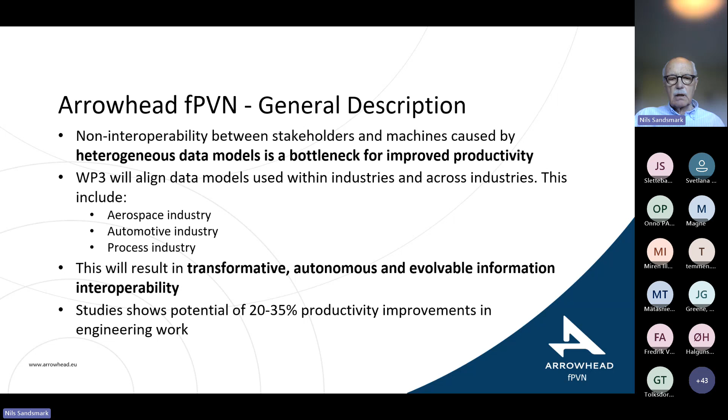There are 3 industries included: aerospace industry, automotive, and the process industry. And process industry also includes oil and gas. We have started out by looking into what data models we should look into and with what standards we should look into, and they are listed here.

The automotive work packages, or use cases, are a little bit special. It's much about how to produce things efficiently, talking to machines instead of pressing buttons, and so on and so forth. For the aerospace industry, those standards listed here are more familiar to at least those of us who have been working in the aerospace industry. And the same is the case for the process industry - these standards should be fairly well known to everybody working in the process plant industries.

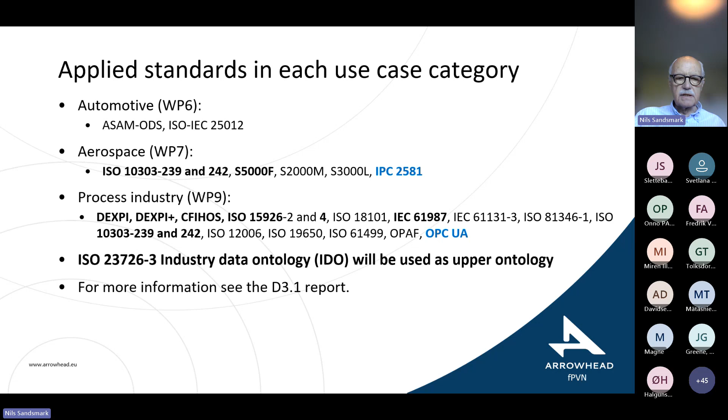What we are doing right now in this project is, it's been decided that we should use semantic analysis and semantic technology to improve interoperability. The goals set out from EU are to support the cross-industry interoperability framework, and they want interoperability across industries, not just within an industry. For this particular project, a semantic technology approach is used, and then there are goals about the level of interoperability that we should reach.

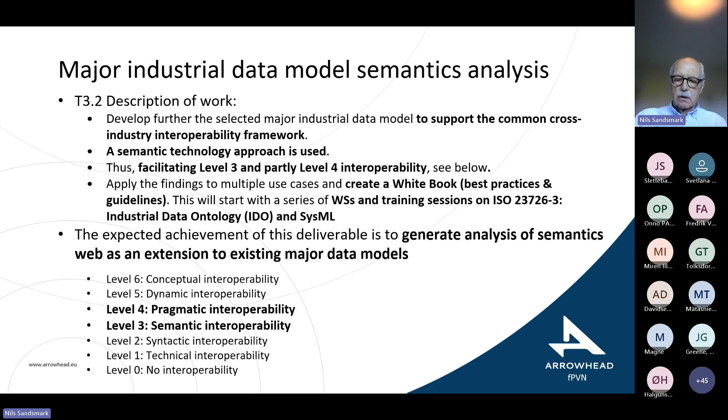The main deliverable is really to create a white book with best practices and guidelines, and this training session is the start of that. In addition to the IDO, it's also a training session on SysML, which is good, running in parallel with this. The expected outcome is to generate an analysis of semantic web as an extension to the existing data models. So that is the goal.

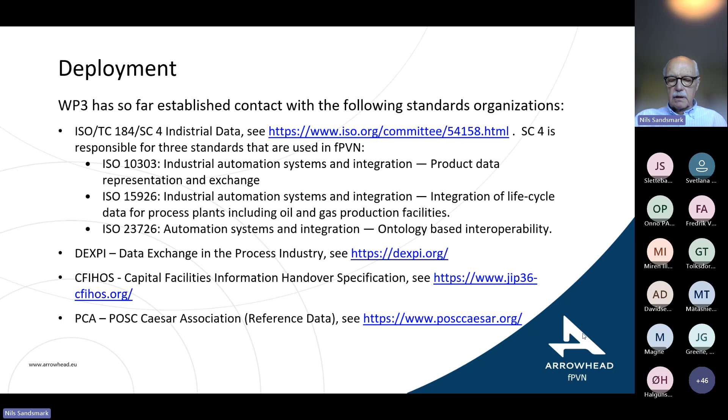And here are the standards organizations we have started to work with, made aware of this project and asked for cooperation with, and so far that has been okay and successful. They are interested. In ISO, it's in particular Technical Committee 184, Subcommittee 4, Industrial Data. And certainly DEXPI, which has been mentioned already, and CFIHOS and PCA, which is the organization I'm working for.

That was about the Arrowhead fPVN. Any questions before I go to DISC?

Okay, as I already have mentioned, DISC is a cooperation between Equinor, Aker BP, ABLE, and Aker Solutions, and it is about interoperability, just like the fPVN project. The goal is to move from a document-centric work process to a data-centric work process.

And in particular, the OBI IDO standard is used, and also the IMF, information modeling framework, is heavily used, and the principle from that standard is coming from ISO IEC 81346 Part 1 and industry standards like DEXPI and CFIHOS. So there is overlap here, and we are trying to do our best to not duplicate work, but to align work so we can all get more.

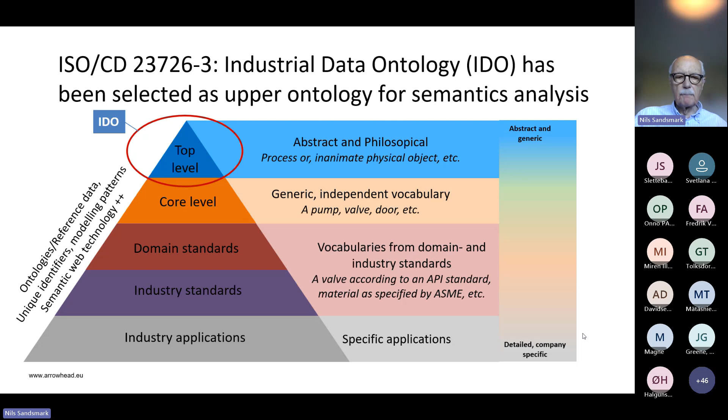So then to the training. The objective is to provide the necessary training for both modeling and subject matter experts to enable the creation of the modules I just talked about, and also to enable the participants to use IDO to develop interoperability between these major standardized data models. And I've highlighted a few of those which we think are probably the more important. At least that is where we are starting.

And we also need to clarify the role of the IMF, the information modeling framework, which is heavily used in the DISC project. And we also hope to be able to create an OBI community, not just a community for IDO that exists already, and we, of course, will need to communicate with those who participated there how to develop this further. I mentioned the three projects already, so I'm not going to repeat that.

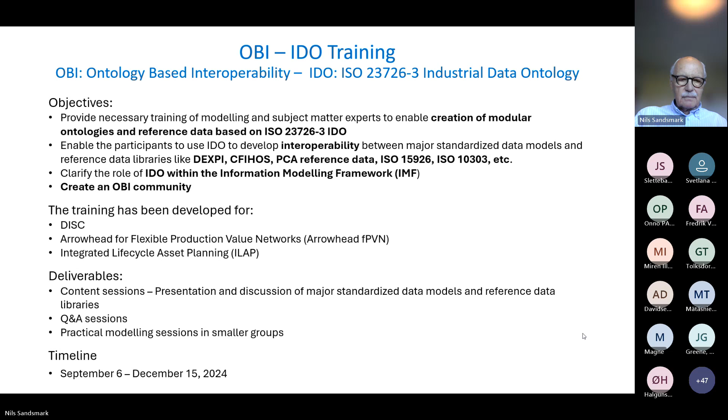This is the schedule. The first is this introduction I'm trying to do now, and then there will be a presentation of the DEXPI model. Next week we are planning an introduction to IDO, then a question and answer session to discuss IDO in connection to DEXPI. And then we have the school break in Norway where we won't have a meeting. And after that it will be the STEP standard and so on and so forth.

So we will come back to what we put in between week 40, between October 19 and Christmas. And we are planning to continue this next year also if this is successful. So with that, I think I will open again for questions if there are any.

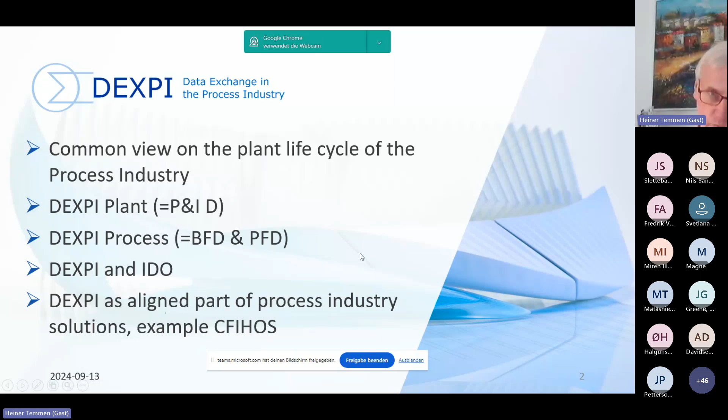Heiner, could you please click on Ausblenden so we can see the full slide? Where is Ausblenden? At the bottom of the slide. Teams is at the bottom, down. Okay, Teams, okay. Yes, okay. That's the rule from Gregor. In many cases, he has better knowledge than me.

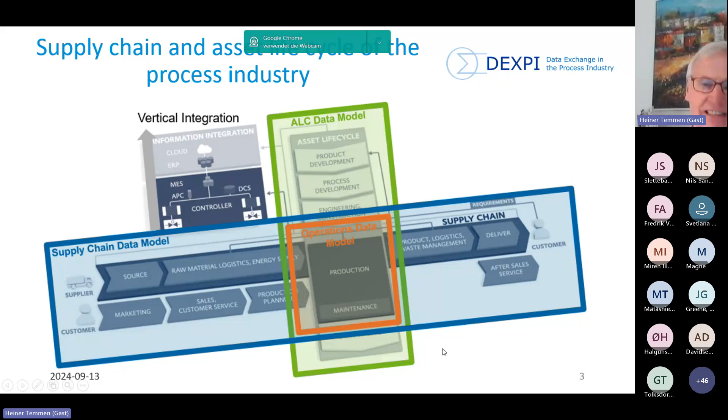Thanks, Gregor. Good. Yes, and some of us perhaps know the results from the ISO 15926 community with the plant lifecycle model, an important model beginning with process design, going to detail engineering, procurement, product specification to the vendor market, to the products, to manufacturing, to maintenance, to operation. All these things are covered in this model.

And if we have a look, what are the important information structures in this landscape? We see at the beginning there is a world of the chemical process, with activities like pumping or storing or reacting or heat exchanging, and the world of calculated streams. Then the next big information structure is about the plant itself. We have a process, and then in process engineering we have to design the first cut of the plant, first with functional and later on with physical objects.

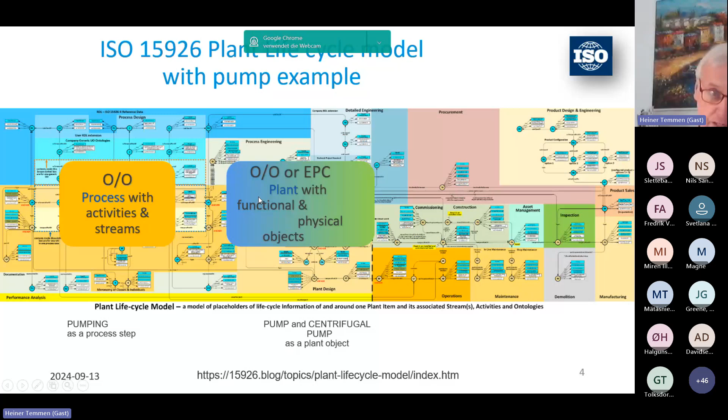In our examples, we have perhaps the pumping activity, and we decide how many pumps we need for this activity. Then we use pumps here as a color blue, and later on, in more detail engineering, we say for this kind of pumping we need a centrifugal pump, and we do technical specification for this centrifugal pump. Then we go to the vendor market and have a look at the product catalogs as non-physical objects, and perhaps we buy one of these products.

Then here we have a product which we have bought as owner-operator or EPC, and we inventory this as an asset in our owner-operator structure, and we relate this asset to the plant item here. That is a central view of the plant life cycle, the asset plant life cycle we have.

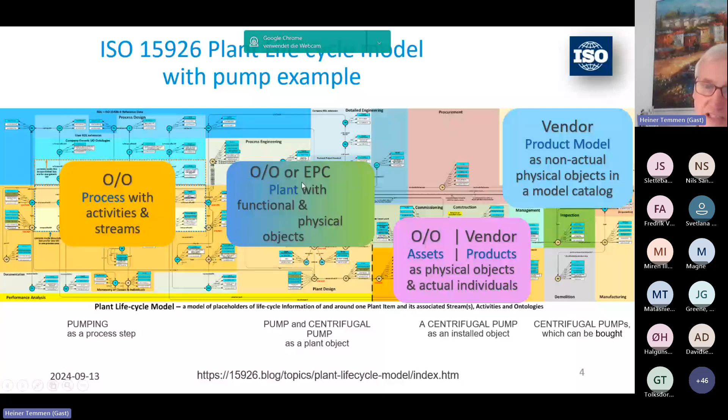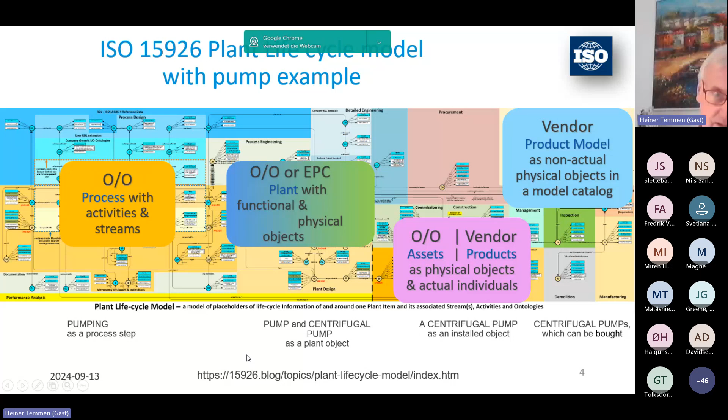Let's say with the important structures, process, plant, the world of the assets, and here is a combination from the types of devices which were on the market and which were bought as products and invented. The same physical thing is invented as asset here. That is important, that is our view, and we try always to use these structures. For the different structures, we have the colors orange, blue, green, purple and pale blue here, and we will see this again in some minutes.

What's about DEXPI, our mission? Our mission is to develop and promote a common data exchange standard for the whole process industry, covering all phases of the process plant life cycle, from the specification of functional requirements to the asset in operation. We know this is a huge task, and we started with the model for P&IDs, and last year we added a different one, the next one for the process structure with the block flow diagrams and the process flow diagrams. Those are the two modules which are specified by DEXPI.

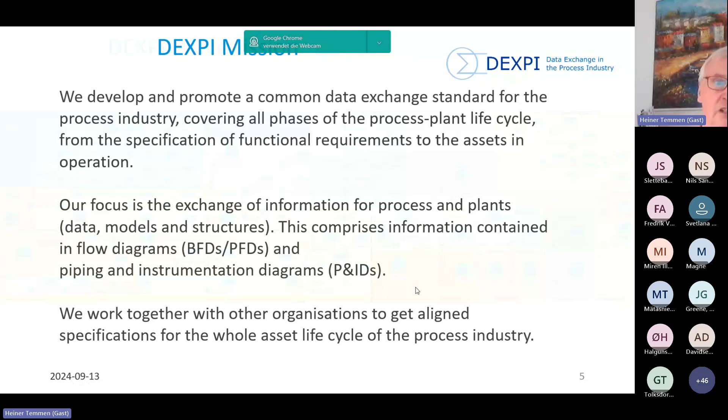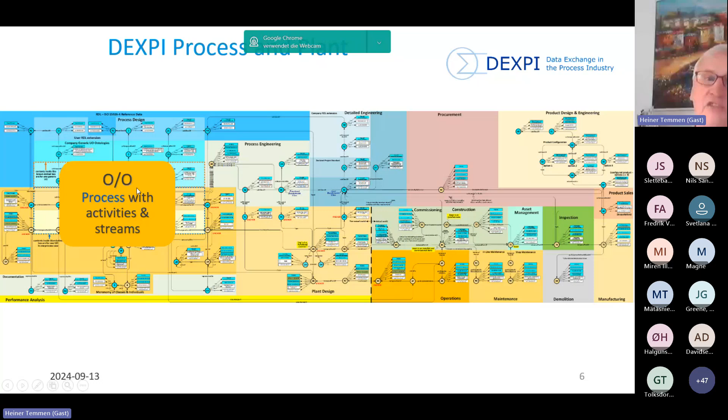Now let's go to the two specifications we developed in the past. The first in the life cycle view for process is DEXPI Process, as I said, for block flow diagrams and for process flow diagrams. Our first big module was for P&ID, DEXPI Plant. Now we use these names. In the past, we had only DEXPI and meant the P&ID, but to have a good view on it, we have DEXPI covering both process and plant.

And for the purple and for the pale blue world, from DEXPI we have no specifications. We try to align our specifications with the specifications here in this area. We are not able to cover the whole life cycle, but we try to cover these two important areas with our DEXPI specifications.

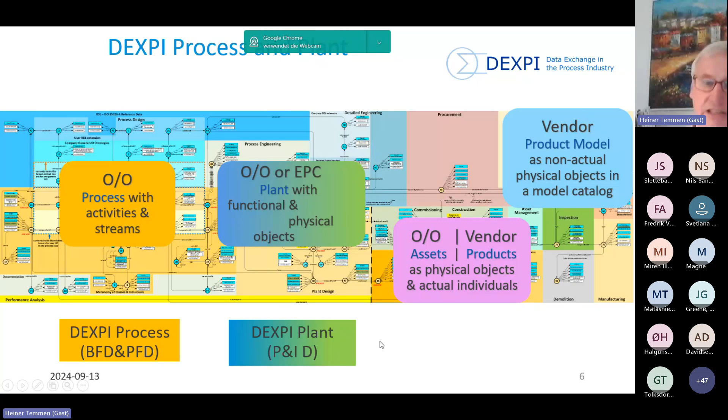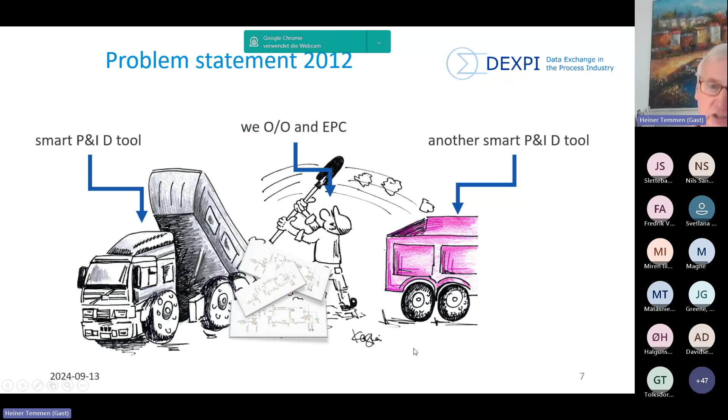Our starting point now 12 years ago was illustrated in this picture. We have different P&ID tools, and what we do in between, if we use an EPC from the view of an owner operator, the EPC has another P&ID tool, and this kind of working was done by owner operator or by EPCs. To bring this to a better kind of working, that was the first big task for DEXPI Plant.

Let's say how we tried to solve this task. We try to think global. It was started by, let's say, perhaps some German owner-operators like BASF, Bayer, and Evonik, but all these three companies are acting worldwide, and therefore we said we have to think global. And we started with a limited scope. In that way, we know ISO 15926 Part 4 was an important reference data library, and from the beginning we had this in mind.

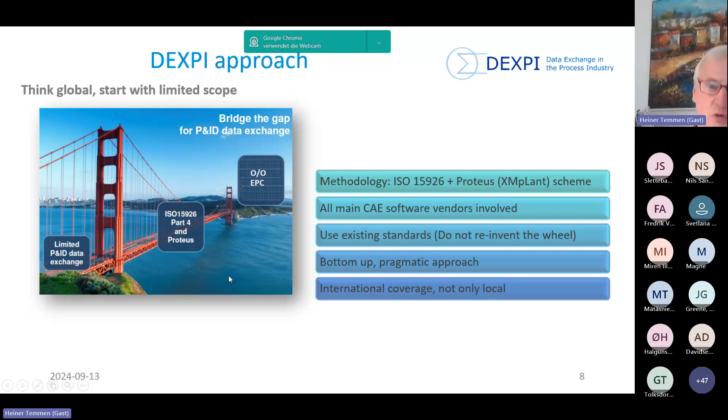And we worked together since the starting point with the important P&ID vendors, and they said for us at that time in history, Proteus schema is the best specification for transporting it. Those are our big points which we try to cover: ISO 15926 and Proteus—perhaps some of you know Adrian Lord with his XMpLant—and we involved all P&ID vendors. We use existing standards. That's important to know, we try not to reinvent the wheel. We had a bottom-up approach, and as I said, to be international, or let's say to be global, was a starting point at the beginning and important for us.

That is our typical P&ID we always had for our discussions. If we look at this kind of P&ID, we see the three main disciplines or groups of plant items: piping and instrumentation, how it's in the name, P&ID. What I didn't understand is the main things in the P&ID were the apparatus and machines, but not covered in the name. Not important.

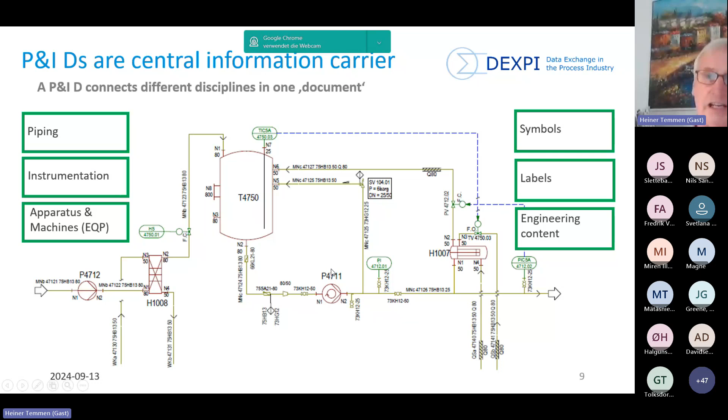In the world of P&ID, the world of the engineers, there are symbols, there are labels, and of course there is a lot of engineering content in the P&ID. The whole topology of the plant is illustrated and covered by the P&ID. And we see some typical things from P&ID.

Some were more from the older time, from documents. That is the world of off-page connectors. We have some kinds of annotations, and most P&IDs have a kind of title block, let's say master data, which was important perhaps for the breakdown structures. And that was a task 12 years ago to define

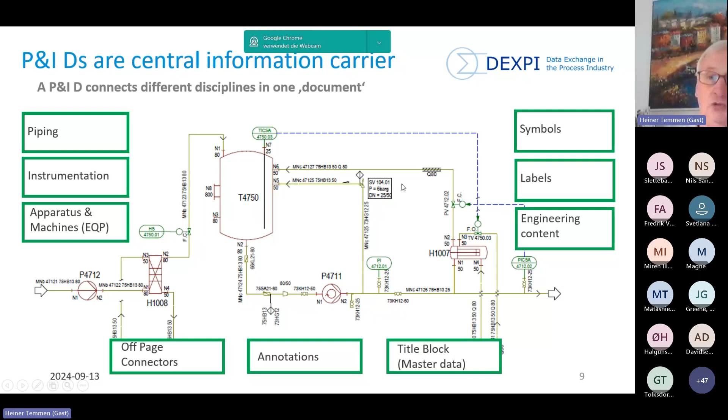a transport standard for P&IDs. And it's important to know it is a transport standard and not a standard for how to make the best P&ID in the world.

We developed some design principles: openness and transparency of the data model. We have test cases, and we communicate everything in our community. We try to use internationally accepted standards, and I will show you the important one on the next slide.

It's important to know we have a separation between engineering content and graphics, and the order is important. The engineering content was the main driver of our thinking, not the graphics, the old world of symbols. Of course, we have to cover it, and how, I will explain.

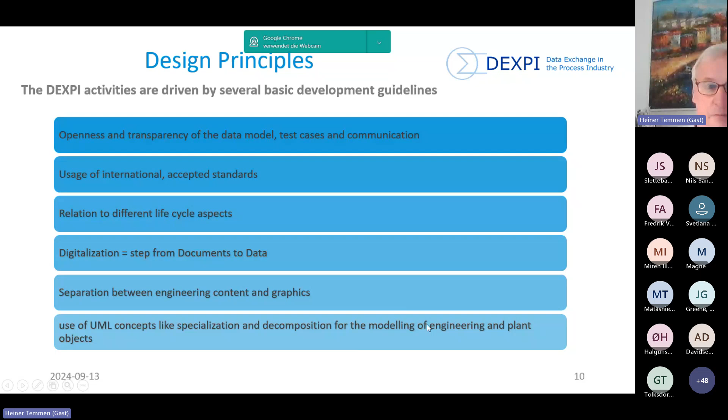We use UML concepts like specialization and decomposition for modeling the engineering and plant objects. Those were our main principles for our design.

Now let's go to the international standards we use. We found that for the plant structure, there are important definitions in ISO 10209. For apparatus and machines for P&ID, we found specifications in ISO 10628, part 2 I think, and the same for piping. There are groups and the symbols are groups, and our specifications are based on this kind of groups in that world.

In the instrumentation world, we used IEC 62424 for the more blue part, for the functional view, and a little bit of IEC 61987 more for the detailing view.

For communication and as a reference data library, we use part 4 of ISO 15926 and the Proteus scheme, which was formerly known as XMpLant.

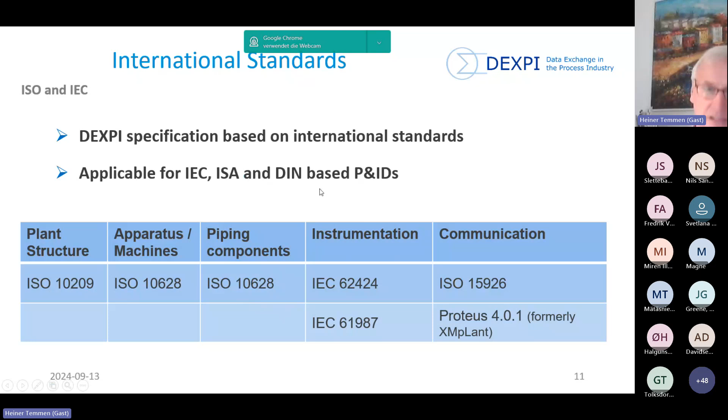Very important to know is we use this standard, but it is applicable for IEC, ISA, DIN-based P&IDs as well. It is not restricted that you must use this standard in your P&ID configuration. It is important for our transport standard, and we try to cover all the different standards which were used for P&IDs. That is very important to know - based on international standards, but trying to cover other standards as well.

Let us have a look at the different points here, perhaps from ISO 10209. We found some definitions. We had a look at the ISA world, we had a look at the DIN world, and we said okay, we use in our breakdown structures, of course, at the top, enterprise. And then we have the sites.

Then there are industrial complexes, and the industrial complexes contain some process plants, and that is the middle of the thinking. The process plants have plant sections, and we know in the ISA world the plant sections have a slightly different name - it has the name process unit, and that is the same. And below we have the different kinds of plant items for apparatus, machines, piping, instrumentation, electrical, and so on.

And we support additional structure things, and area is important as a subset for geographical parts from the plant. What is not here, we also support systems and trains in the structure as well. And the major parts in the breakdown structure are process plant and the plant items.

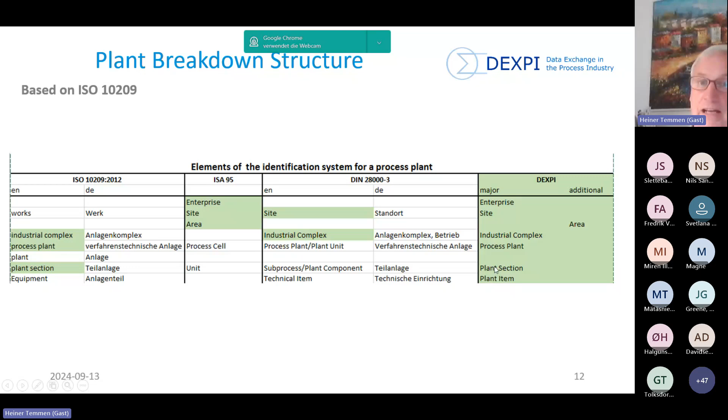Let's have a small look at the apparatus and machine taxonomy. We use, as I said, the groups from ISO 10628 with its 21 groups. So for that we have vessels, pumps, heat exchangers, and so on, with the color blue. That is, let's say, the functional design level for a plant.

And then we say there are subclasses for pumps, like the well-known centrifugal pumps, oscillating displacement pumps, and some other types. That is the level in green for the asset specifications, which are the subtypes of the functional design objects.

And then we saw that sometimes we have to go a little bit deeper. This kind of thinking, how deep we should go, is based on the maintenance standard for oil and gas, ISO 14224. ISO 14224 has, in our view, two important concepts. One is maintainable item - we have to look at impeller, displacer, nozzles, gearboxes, and so on. The other concept is the boundary concept: which components belong to which apparatus and machines. There are answers in the concept from ISO 14224.

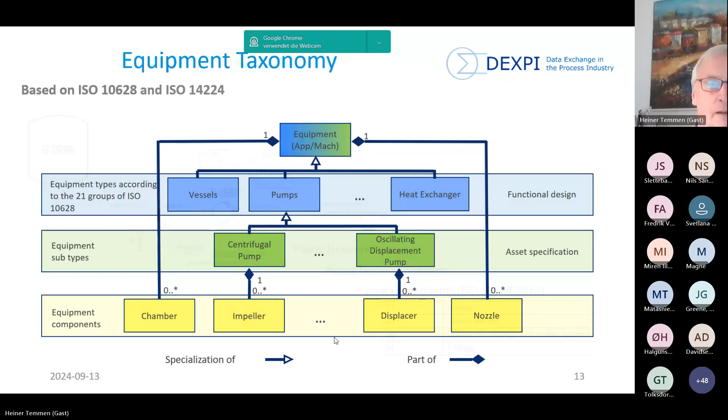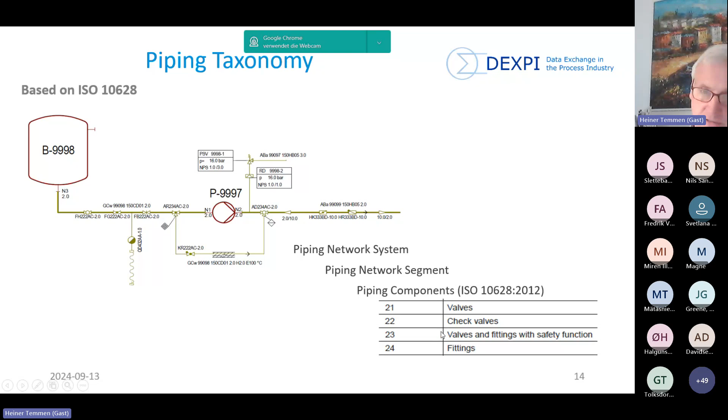And in the middle, as we have here in the pictures, we always have the bubbles, and the bubbles are represented by process instrumentation functions. That is a term from ISO 15926 part 4. In IEC 62424, the name for this is PCE request. But we have a common view - let's say different terms for the same thing.

Then for the different bubbles, we can put them together into loops, and we can say there are different children possible for a bubble that is sensing something. We have process signal generating functions, and for actuating we have the actuating function, and we have signals between them. To cover the actuating electrical functions as well - perhaps for a frequency converter or to control heat tracing things - we have the additional part for actuating electrical functions as well.

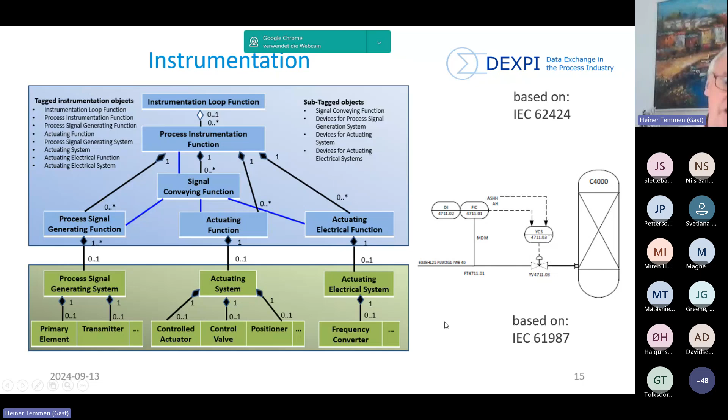I said something about symbols, and I know in the Norwegian community, the NORSOK standard Z004 is important. And we know DEXPI is a data-driven standard. But symbols we also consider, though not as a primary part, only a secondary part.

We can relate symbols to every instance of an object. And we found that there are two standards for how to handle symbols: IEC 81714 part 2, and ISO 15519. In these two standards, there is a definition that a symbol can be identified by 4 parts.

First is the domain, second is a symbol number, third is an orientation, and fourth is the version. With this concept, it is important that with the DEXPI concept, it is possible to change symbols when you export the P&ID and import the P&ID.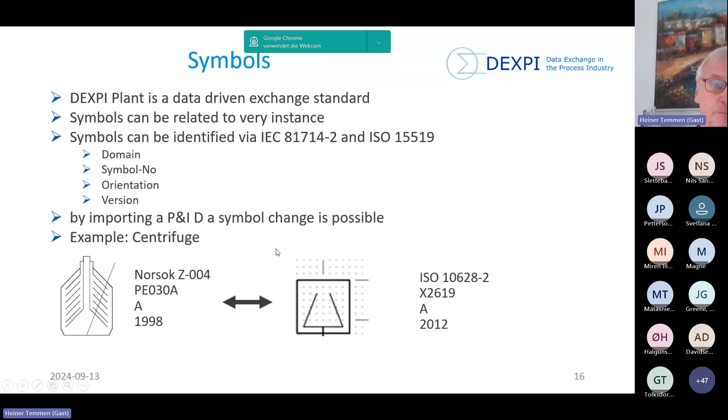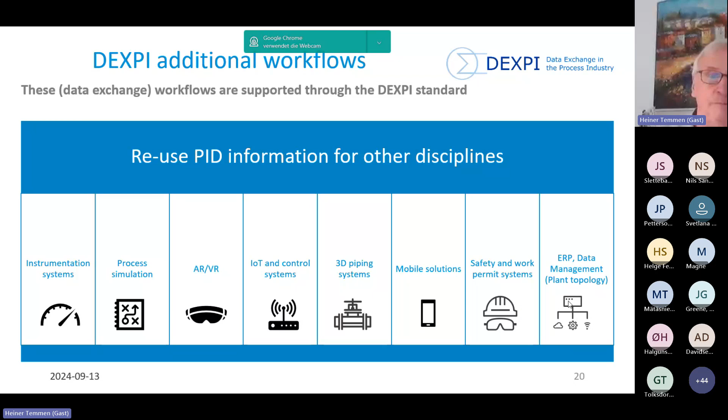Let's go to the second specification. The DEXPI process addresses a blind spot in the standard landscape. I do not know if David Cameron, the main author of this concept, is in the call. He is the main author of this concept, using all the concepts from DEXPI plant.

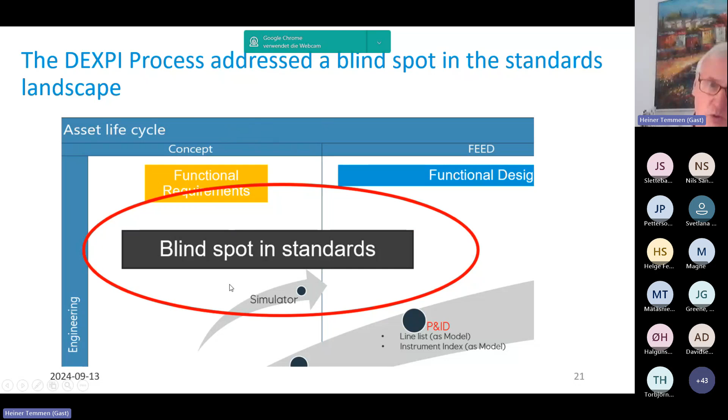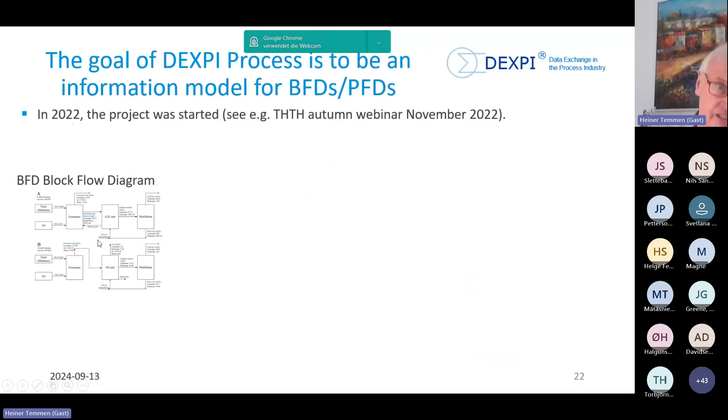And for this part, in the first phase of the asset plant life cycle, there was no standard. And this is now covered by DEXPI process. DEXPI process was started two years ago, and it covers not the P&ID, it covers the block flow diagrams and the process flow diagrams. This process model is based on this specification and covers that.

And we saw what I tried to explain before is the P&ID with the piping and instrumentation diagram, and that's for the plant model. We use for both the same concept, and this is now, let's say, the brother or sister of the plant model. Now we have an additional model, the process model.

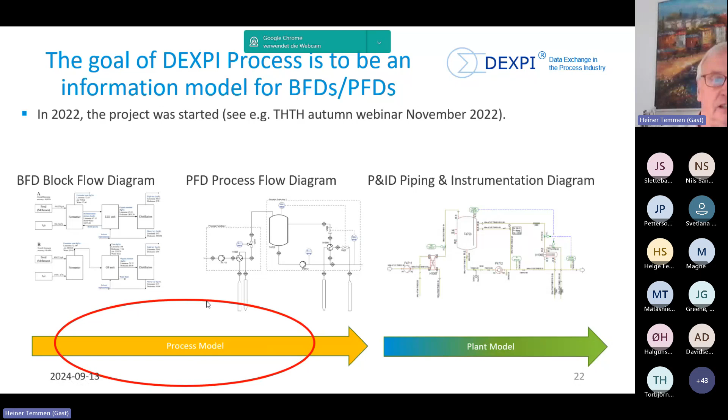This process model covers the world of calculated streams with the material template and with all the components of the streams, and all the things which were covered here, with the input also based on the principle to use standards which were implemented with Cape Open and Onto Cape.

Based on that, David designed this model, and there is a hierarchy of the process steps. The process steps define what must be done, and then how it should be done, and that is a bit deeper, the level of the unit operations with the component systems.

Here we see the upper part is more for the block flow diagrams at that level, and the lower part is more for the level of the process flow diagram. And here we have the typical things we need, perhaps for heating, cooling, heat exchanging, separations, and so on, and that's all covered by the DEXPI process definition.

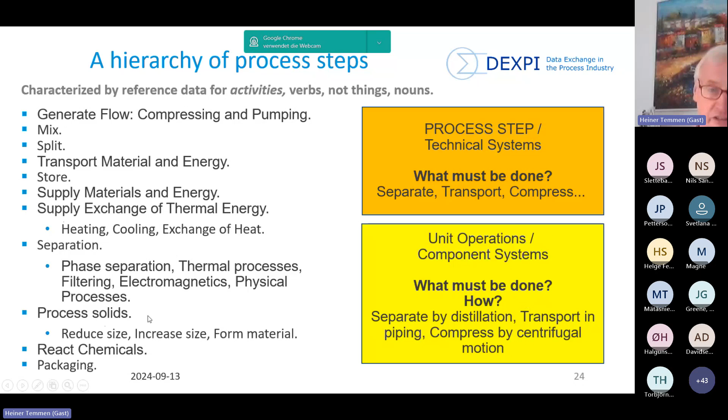And the classes we have here are also classes from part 4, which, as I said, is our main reference data library. Last year we published the result of this project, and everyone can have a look at this first manual. We have this as a release specification, now nine months old.

And David has a very good publication about DEXPI process, which can be used to understand the concepts more, and David here is the main author of this publication. And now the next task is, and that is a task for Gregor and for the world of content and handling the specifications.

We have two specifications, and now we will build a common specification for both. This one we use, as I said, here in the plant world, we have Proteus, and I think it's not official, but I think XMpLant or Proteus will be more history, and newer serialization formats will cover both.

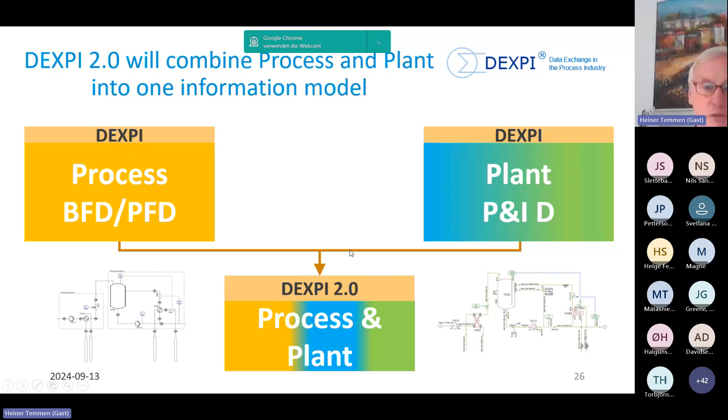I have a look at the watch. I think I will use some minutes more to explain what we will do with IDO together and with CFIHOS. And then, Nils, I think we have time for questions and answers as well. Is it okay? Yes, that's okay.

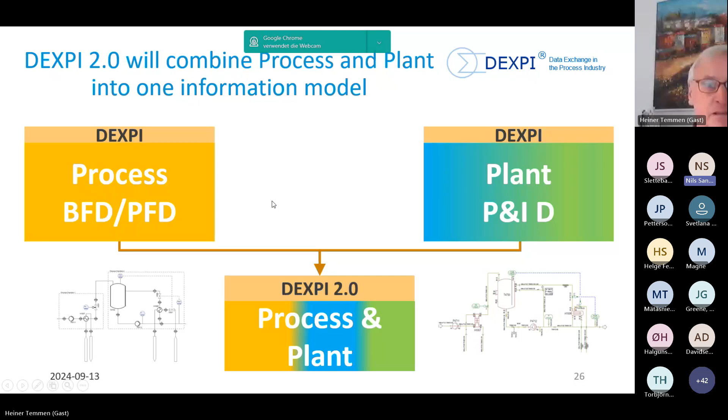Good, thanks. We defined a pump life cycle story from process to process plant, and what's not on the picture, to assets. We have an example defined, and now we try, in IDO use case 7, to solve this use case with the concepts from IDO. It's not so easy to do, but we are on a good way, and with support from Torbjörn and especially from Dirk last week, we had first solutions for some of these things, but we have to continue the work to solve this use case with IDO concepts.

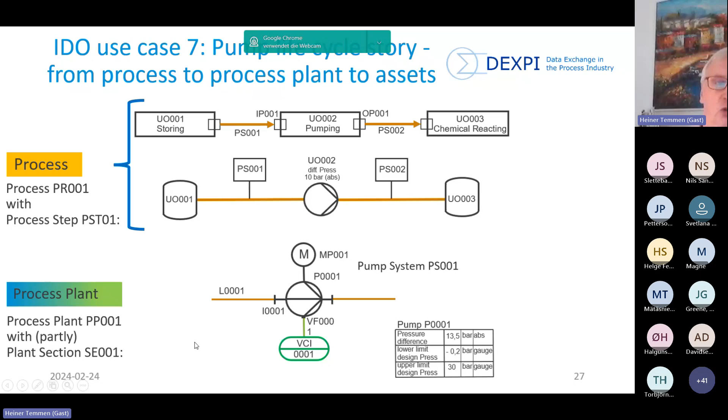What we will do more is continue the work with this use case 7. We have two ontologies under the core ontology from IDO, and some of the process definitions we need for DEXPI process were in that process ontology, but not all, and we should try to populate it with all we need. The same is true for DEXPI plant: there is the corresponding ontology in IDO equipment, and several classes are in, but not all, so we should try to populate all needed classes in that ontology.

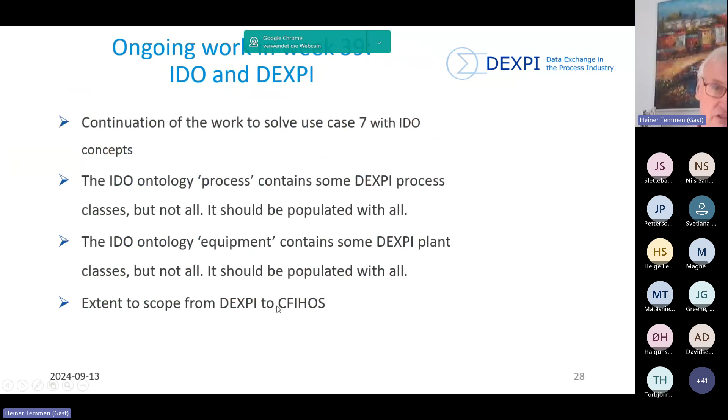What we have done for DEXPI is also possible for CFIHOS. CFIHOS is an important initiative. I do not know exactly how old it is, but it's now, I think, 4 years under the roof of IOGP, and the years before it was under the roof of USPI. It is a handover specification, the oil and gas handover specification. In the first years it was more document-driven, and now it is more data-driven.

CFIHOS is under the roof of IOGP, and on the web it is called number 36. The key deliverables are the whole world of documents that make up CFIHOS, including the technical specification and the process guidance document. Two other important deliverables are the data model and the reference data library, using nearly the same concept as DEXPI, which uses ISO 15926 as its primary reference data library. The same concept is used by CFIHOS as well. Here is a little screenshot of how the data model looks.